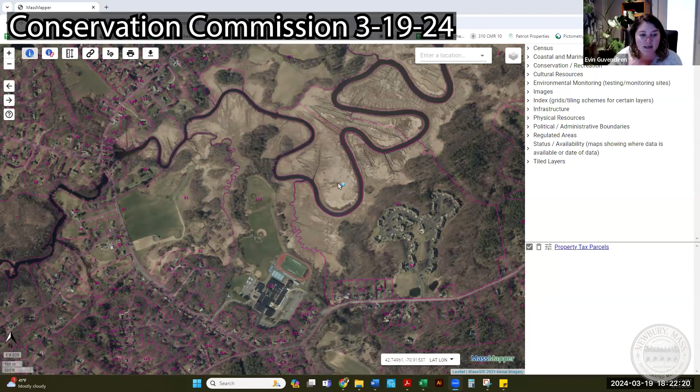The only change from what was originally proposed in 2021 is that MBL would like to install just one boardwalk length perpendicular to the existing boardwalk. There are 2 reasons for that. The first reason is that their focus for this year's study is on the dynamism of tidal flushing, and that data will be collected from the Typha closer to the river here. That's the first reason why they'd like this additional boardwalk, so they can have more access to a greater sample size.

The second reason is because the researchers, when they access the site, don't trample the vegetation. They only remain on the boardwalk to collect samples, get to the tower, the solar panels, and write their notes. So if one person is on the boardwalk and another needs to pass, it's really difficult to shimmy around each other. This perpendicular platform allows a researcher to stand off to the side for another to pass. So that's the first small change.

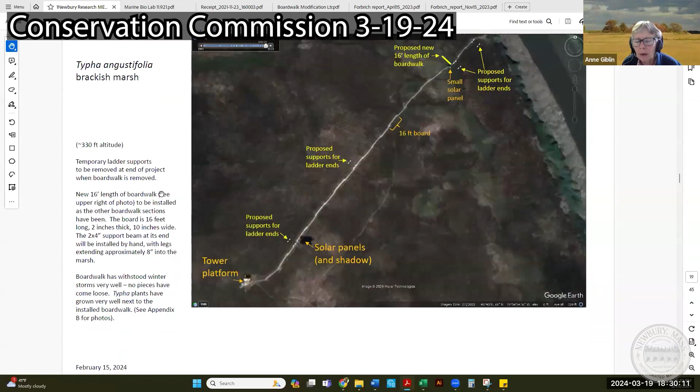And remind me how high it is above grade, the boardwalk itself? Maybe Aaron has the exact figures. There's a platform that it stands on that's about 5 feet high, I would say, and the tower itself is probably another maybe 2 meters. But the boardwalk I'm thinking of -- oh, the boardwalk is only about, I don't know, maybe 15, 20 inches off the surface. It's supported by just a U-shaped set of boards, and in between it goes the 2x4s.

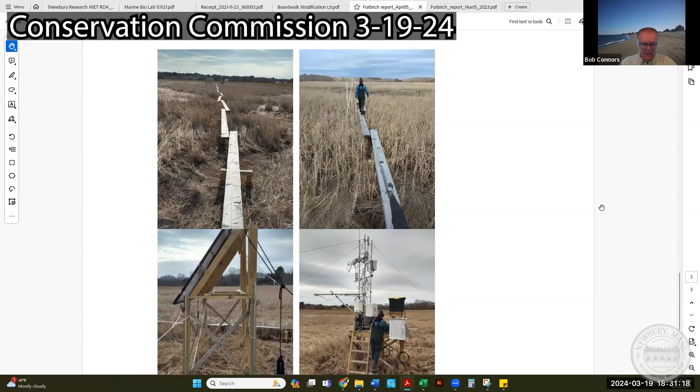Thanks, thank you Mr. Chair. Mary and I were the only two current members that were on the commission at the time of this original application and approval. I do remember granting the waiver for them to keep that in place throughout the winter. But I echo Mary's comment about the 5 years -- if this was 2021, when we first approved it, and you now have funding through 2027 for the applicant, it kind of concerns me that this isn't quite the temporary project that we had talked about. I echo the other members' comments that this is good research, but it seems like it's been a moving target with this, and that's not the original intent of the negative determination request. So I also question whether or not this should be a Notice of Intent, just from a procedural perspective.

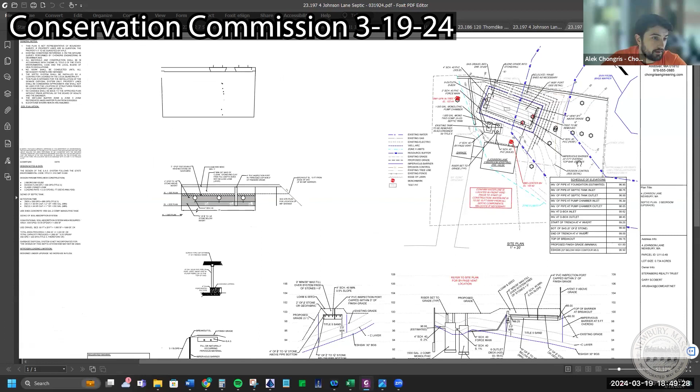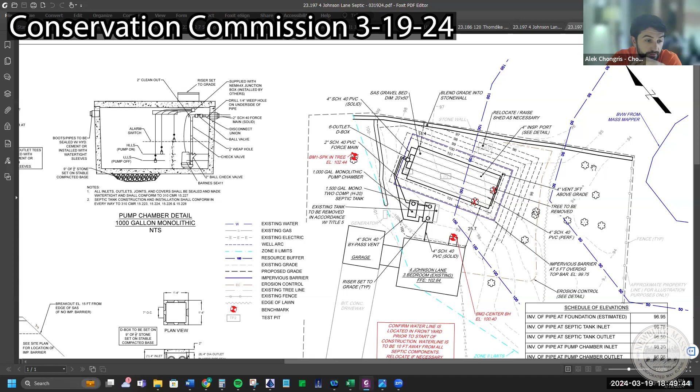Alright, so yep, this is the erosion control, essentially going to be on the edge of lawn. This zigzag line, so no vehicles will be going into the wooded area. But if the construction entrance - we could certainly put a construction entrance on there. It would just be your standard 20-foot by 10-foot construction entrance, coming up the roadway this way. This is Johnson Lane right here.

Okay, Mary, what specifically would you like to have included on this plan for erosion control? Can you slide the plan? Oh, let me just minimize. Okay, now I can see. Can you just highlight again for me where the erosion control is? This brown, the EC, the zigzag line there, okay. The zigzag is the edge of lawn. Erosion control is the EC, the brown.

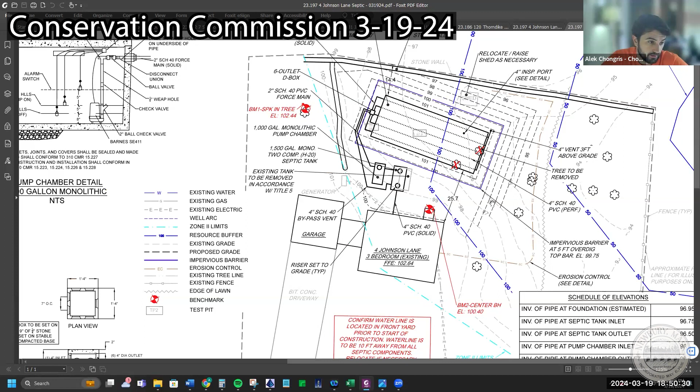Got it, so the equipment is going to pass through, where will it pass through? It would be passing through here - this erosion control obviously wouldn't be shown here. This is the access for the construction. Got it, and it's kind of already set up there - you're not going to, because there's all edge of lawn that kind of brings you all the way to the road, so it's not like they're going to drive through the woods. Yeah, no, I wouldn't.

Okay, that makes sense to me. And actually, the erosion control would be the footprint of where construction would stop anyway. Correct, yep, right to the grading limits.

Okay, alright, let me go back through. Mick, you have a plan in front of you? Any questions for Alek? No - Alek, you and I had discussed this, or we had all discussed it, and it looks like you've already added that additional tail, the erosion control, to wrap up along the stone wall, so I think that's an important part. Yep, and so it looks good for me from here. Any other questions from the members?

Okay, Sean, are there any raised hands from the public at this time for this project? No, not that I see.

Okay, so team, I think the plan - Mary, are you satisfied that the plan contains the proper erosion control? I'm satisfied with that, yes, that looks good. I just couldn't pick that out on the plan very easily.

All right, I'll entertain a motion to issue a negative determination finding for 4 Johnson Lane. So moved. Can we modify that to add some special conditions? Sure, certainly.

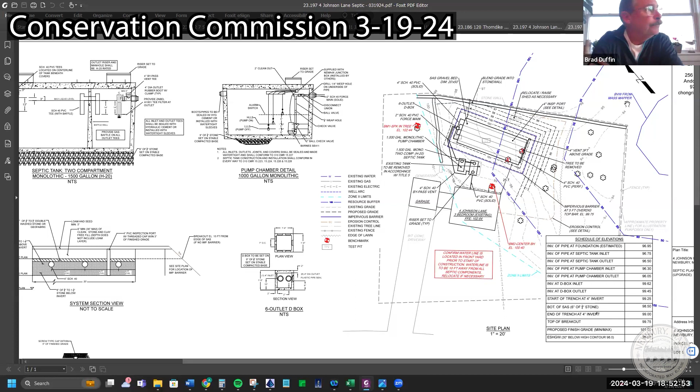Okay, anything else? That's all. Okay, so why don't we do this again - I'll entertain a motion to issue a negative determination with the findings as mentioned by Mary. So moved. Okay, do we have a second? Second. Okay, all right, roll call vote, all in favor.

Mary, yes. Woody, yes. Brad, aye. Mick, aye. Diane, yes. And Bob Connors. Thank you, great, thank you guys.

Okay, next matter, public hearing, DEP file number - this was unassigned. So Sean, has that changed since - I looked this afternoon but I haven't seen it. I checked around 5, after 5:30, but still did not see a number. So this is for 18 Temple Boulevard West, for addition of a deck, elevated walk to dwelling, reclamation, expansion of existing parking area.

As we don't have a file number, we don't have any technical comments. I deem the submittal incomplete at this time, and I would ask if the applicant wants to seek a continuance.

Mr. Chairman, first, I was in touch with DEP today, and while they cleared the check, they are unable to find the filing. I have the certified receipt - they received it on the 6th. So what I would ask is that, because I understand at least one neighbor sent in an email, and if any neighbors have attended, that I just give a very quick overview of the filing.

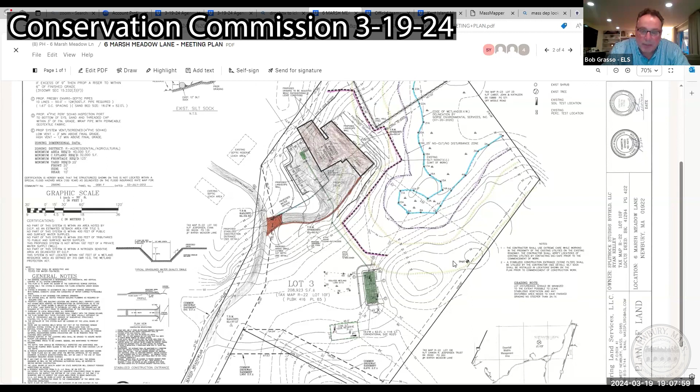All the members saw that the site, previously under the old NOI, had the trees cleared. There's some grading — we've been prying at the ledge just to adjust the dwelling conditions for the bottom of the cellar floor, or the height of the first floor. That's all been adjusted with the architect. I've laid out the existing and proposed dwelling at least three times. We've made adjustments three times to match exactly where the stakes were at the site walk. As shown on the plan right now, those are the stakes at the corners of the building, and the entrance has been cut in. It does drop down, so there'd be no sediment coming out onto the existing shared common driveway. Once we get started, that will be filled in with a stone stabilization entrance. Once the vehicles go in and out — there are no machines on the site right now. We're just waiting for the NOI to be issued, and then waiting for the appeal period to go through before starting construction.

So, Bob, why don't I stop you there and open this up to questions? Sure, but only because this is a fairly familiar project to a lot of us. Well, there's new members, that's why. Mary, any questions for Bob on this one?

Not really, no. I'm not thrilled with the amount of pavement that's proposed here, and I don't know exactly — it looks like there's no stormwater management for it. I know you don't trigger DEP stormwater management standards, but do you have an infiltration trench along the edge of it? Is that what I'm seeing? Yeah, that's that orange line. There's actually details on the left side — a water quality grass swale. They're shown in detail on the left side of the front entrance.

I'm not seeing where that is. Right along the edge of the pavement, there's an orange line. Yes, okay, thank you. Now I see it. All that sheet flow would go towards that swale. Okay.

Okay, thank you, that's all I have, Bob. Thank you, Mary. Woody, any questions for Bob on this project? No, I don't have any questions or comments. Thank you, Woody.

Brad, how about you? Any comments or questions? Yeah, Mr. Chair, Mick and I were out at this site visit walkthrough with Bob and the owner's rep, and went through this, and other than what Sean had brought up about beefing up the erosion control, I think this is fine with me.

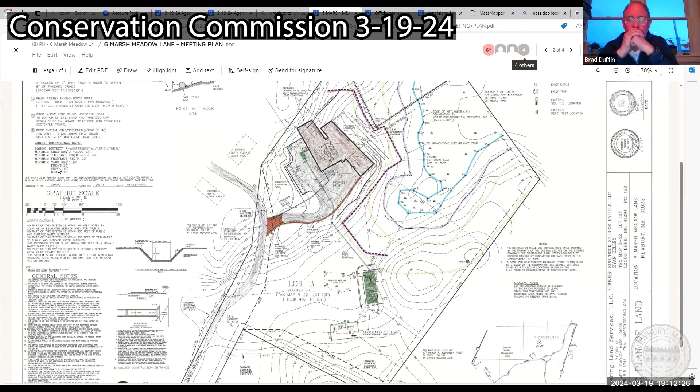I'll entertain a motion to close this public hearing. So moved. Second. Okay, roll call vote, all in favor? Mary? Yes. Woody? Yes. Brad? Aye. Mick? Aye. Diane? Yes. And Bob Connors votes yes. All right team, we've closed the public hearing.

At this point, Sean, we have running standard conditions that we attach to orders, our existing order, our proposed order of conditions. Make sure, if you have any questions on it, reach out to Mary or me, and we'll just make sure it's more of a duplicate beyond previous orders.

So Mary, for special conditions, you just wanted to, I think our regular order, our regular conditions cover everything we've talked about. I think they do, yes. So do we feel there's a need for any special conditions beyond normal? Unless there were some already in the original order, which could be repeated. Okay, I think the standard conditions should apply.

I know that the way our special conditions work, you check the ones applicable to particular sites. So some that have to do with operation and maintenance plans of structural stormwater management wouldn't apply. So I would just reference the original order and have that be similar, and maybe one of us can take a look at it, like you said Bob, before it gets issued. Okay, thank you Mary. All right, I'll entertain a motion to issue an order of conditions for 6 Marsh Meadow Lane with the usual conditions.